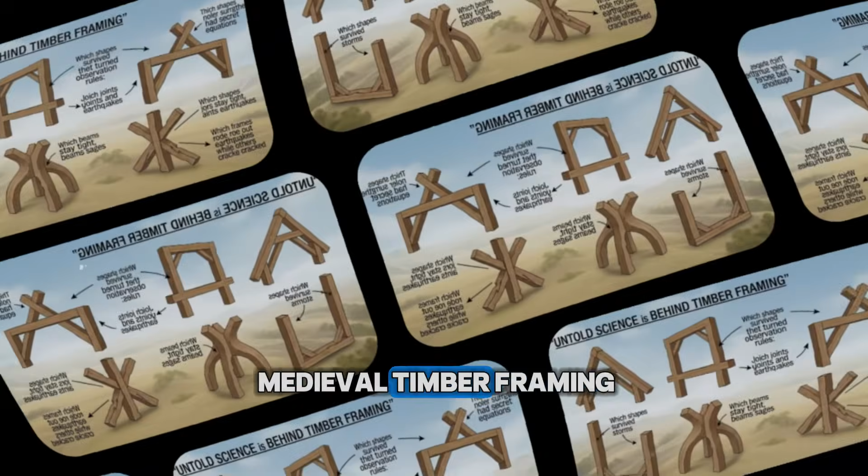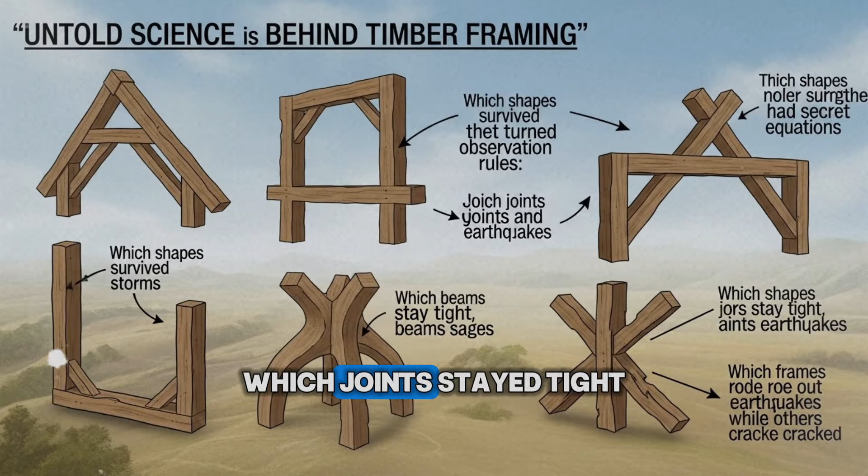The untold science behind medieval timber framing is not that they had secret equations. It is that they turned observation into rules, which shapes survived storms, which joints stayed tight, which beams sagged, and which frames rode out earthquakes while others cracked. Over generations, those rules became a language of posts, beams, and braces that modern engineers now recognize as efficient structures.

The first piece of that language is simple. Always fight bending with triangles. A single beam spanning between two supports is a bending machine. Load it from above, and the top fibers compress while the bottom fibers stretch. The longer and thinner the beam, the worse the bending.

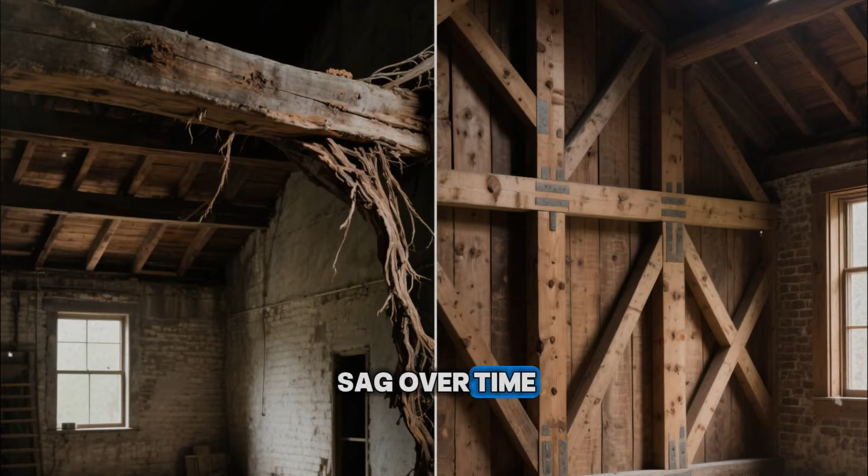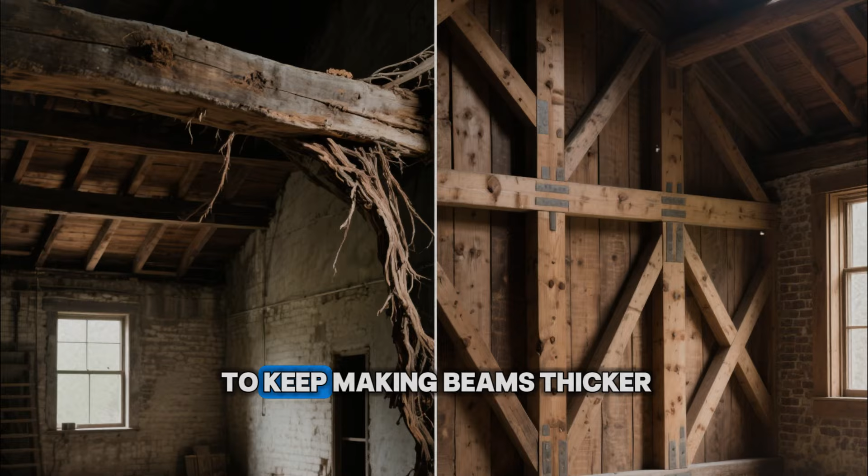Medieval carpenters watched beams sag over time in lofts and barns. They did not know the word moment, but they knew the feeling of a floor that bounced, a tie beam that slowly crept downward, a roof that began to sway. Their answer was not to keep making beams thicker. It was to change the shape of the structure itself.

Look at a traditional timber frame from the side and you will see it. Triangles everywhere. A pair of rafters meeting at a ridge, tied together by a horizontal tie beam. Diagonal braces running between posts and beams. Cruck frames, those huge curved timbers shaped like an A, creating arch-like forms. All of these are ways of turning a floppy rectangle into a locked triangle.

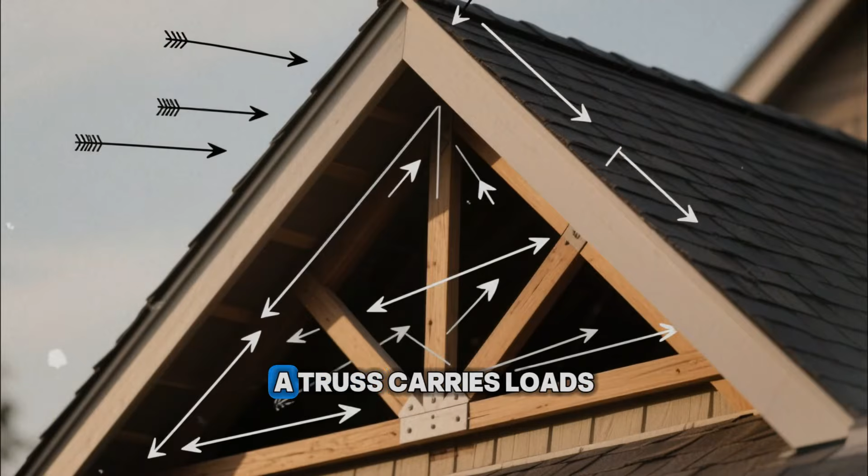In engineering terms, they move the primary forces from bending to compression and tension along members. A truss carries loads by pushing and pulling in line with the grain instead of asking a beam to resist sideways bending alone. Medieval carpenters did not draw internal force diagrams, but they saw that when rafters were tied and braced, they stopped spreading walls. The mystery science is simply this: triangulation.

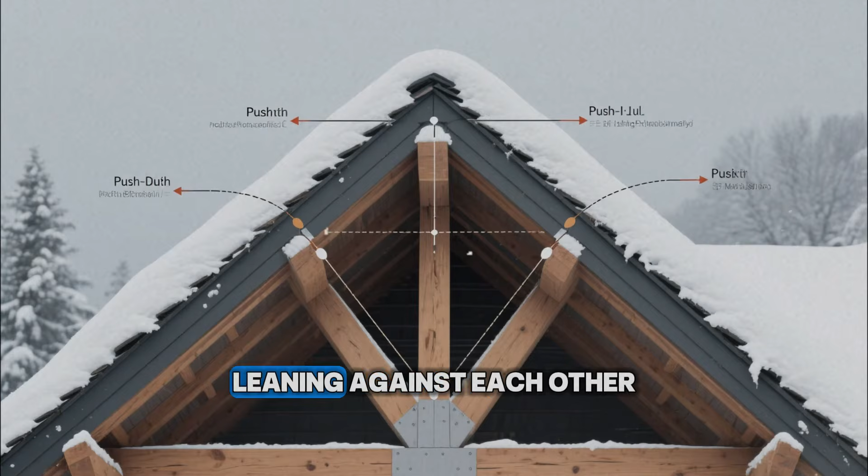That triangulation is clearest in roofs. A simple pair of rafters leaning against each other like an inverted V will push outwards at their feet as they carry the roof's weight and any snow on top. Left alone, they slowly shove the walls apart.

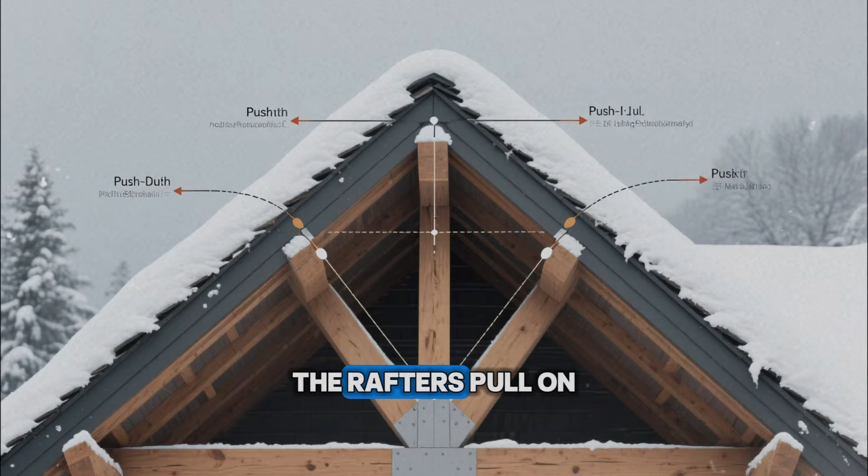Medieval builders learned to tie the feet together with a horizontal member, the tie beam. Now, instead of pushing the walls away, the rafters pull on the tie beam, which resists in tension. The load flows down the rafters in compression, across the tie in tension, and into the posts.

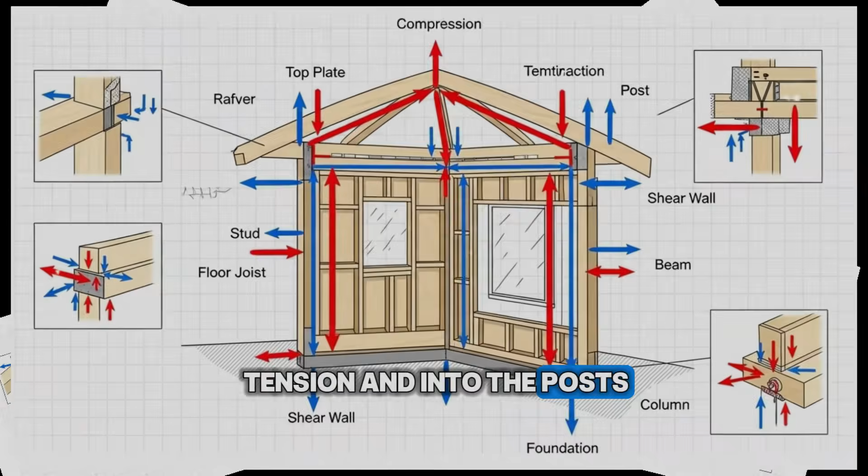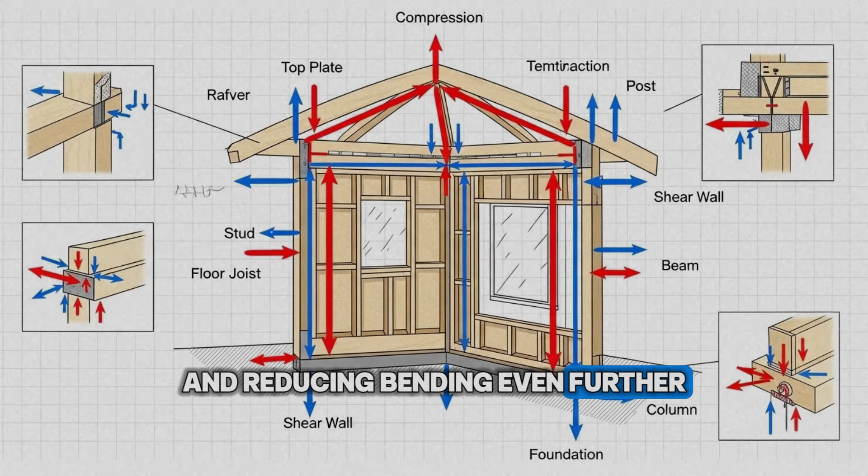Add a king post or queen posts between the tie and ridge, and you get more support in the middle, shortening the effective span and reducing bending even further. Modern texts call these king post and queen post trusses. Medieval carpenters just called them good practice.

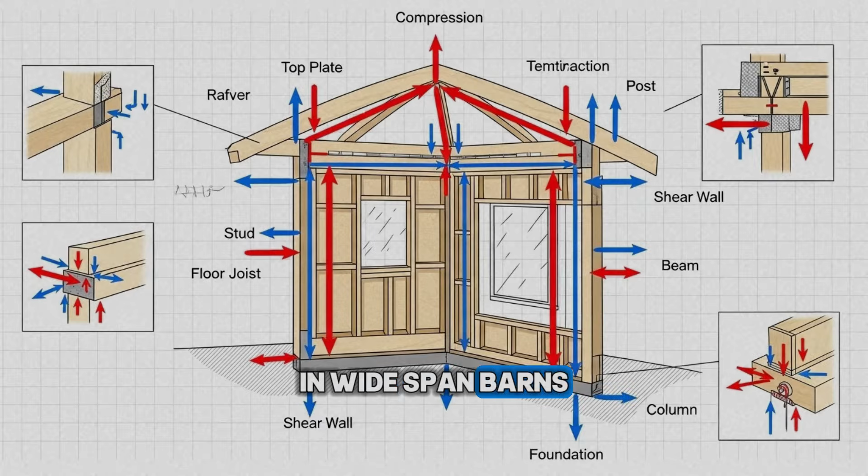In wide-span barns and halls, they extended this logic. Cruck frames, the huge curved blades hewn from naturally bent trees, were not rustic ornament. Their curved shape placed more wood where bending stress would be highest and allowed the roof load to pass down in a smooth compression curve toward the ground.

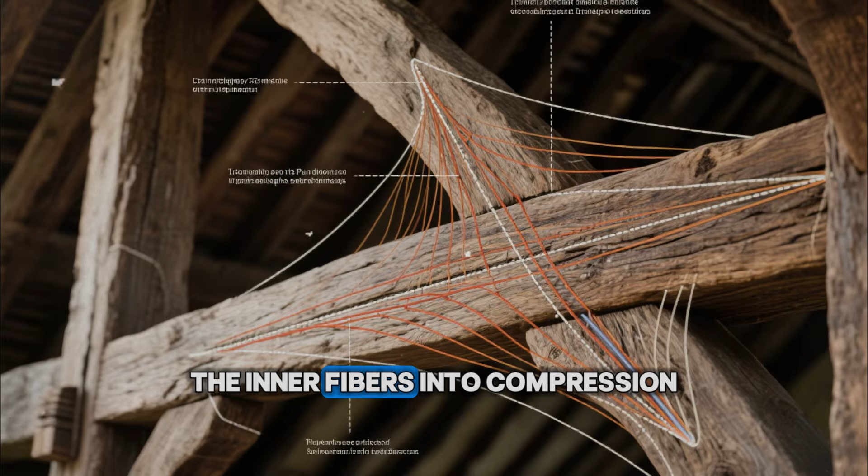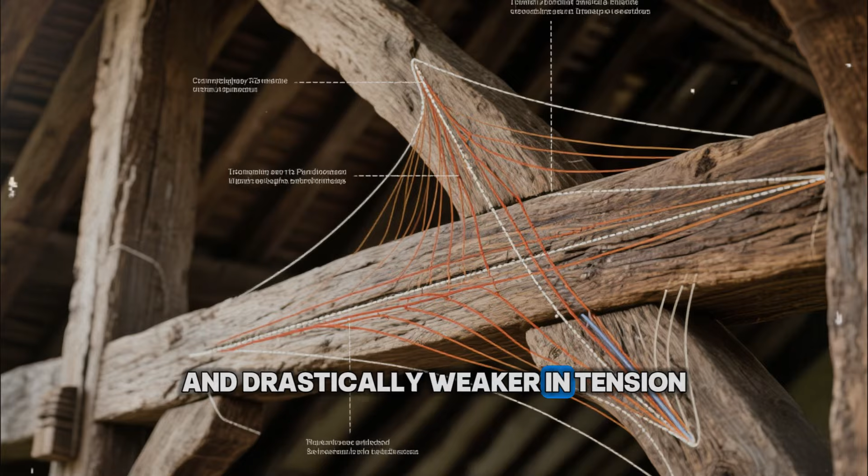The outer fibers of the curve go into tension, the inner fibers into compression, a pattern that suits the anisotropic nature of wood, better in compression along the grain than across it, and drastically weaker in tension perpendicular to the fibers. By exploiting natural tree curves, carpenters essentially pre-bent their beams into the shape loads wanted them to take, reducing dangerous stress concentrations.

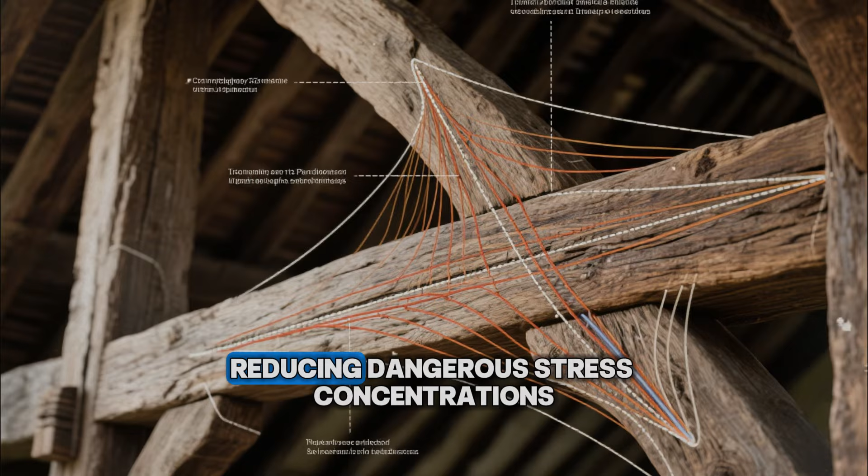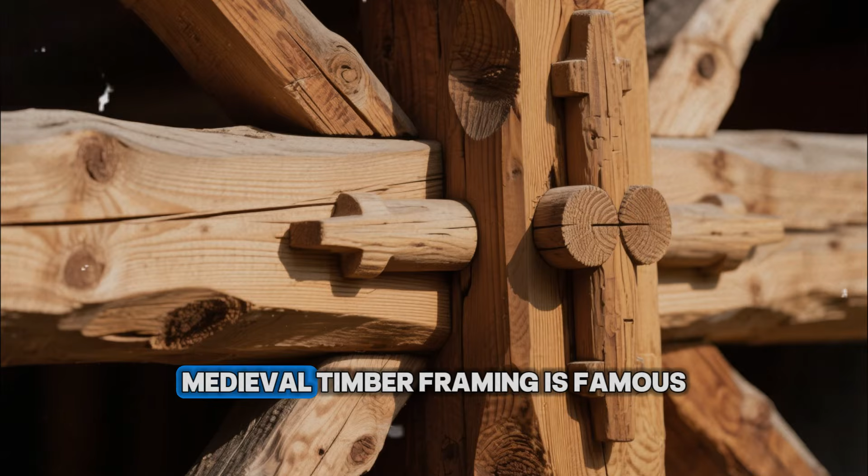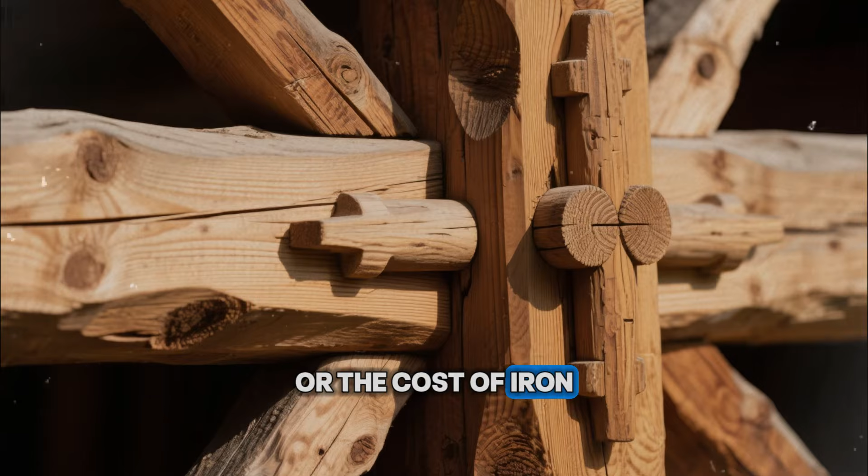Next comes the part that most people notice without understanding: the joints. Medieval timber framing is famous for mortise-and-tenon joints secured with wooden pegs instead of metal nails. That choice was not just about tradition or the cost of iron. It is deeply tied to the way wood moves and how loads travel through the frame.

A tenon is a projection at the end of one timber that fits into a matching slot, the mortise, in another timber. When a peg is driven through both, the joint works in bearing along the grain and in shear across the peg. That means the heavy beam can transfer load directly into the post, with large bearing surfaces and gradual stress transitions, instead of concentrating everything at a couple of metal fasteners.

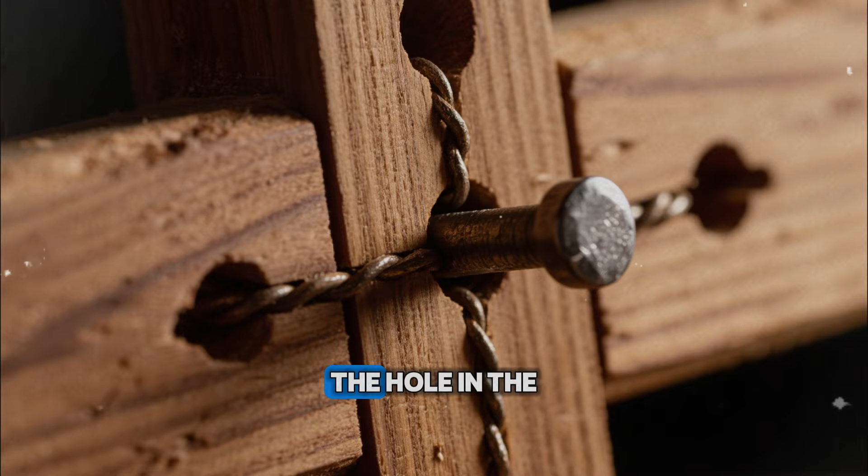Master carpenters took this further with drawbored joints. In a drawbored mortise and tenon, the hole in the tenon is intentionally offset slightly from the hole in the mortise cheeks.

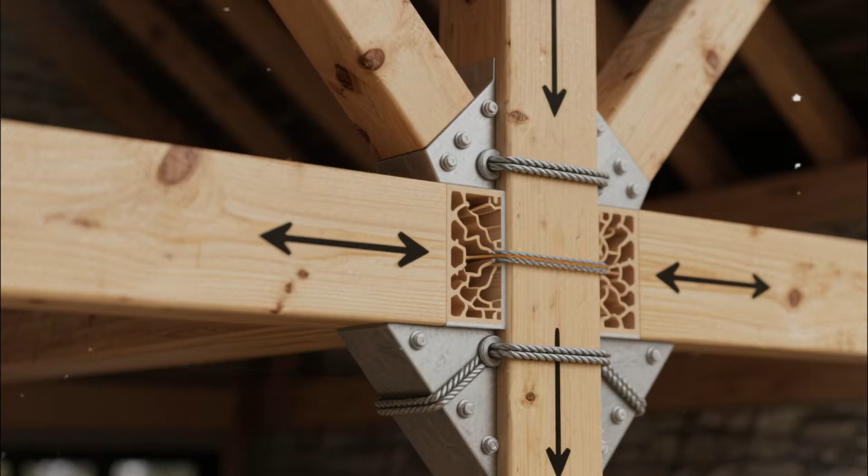When the peg is hammered through, it pulls the tenon deeper into the mortise with constant tension. The result is a self-locking joint that stays tight even as the wood shrinks and swells with changing humidity. Structurally, this pre-stressing reduces slip and racking under lateral loads. The joint behaves more like a monolithic connection, improving the frame's ability to act as a single, stiff box.

The science hiding here is pre-tension, the same principle behind modern post-tensioned concrete, applied with a mallet and a hardwood peg. Look carefully at where carpenters chose to put those joints, and you find even more physics. They avoided chopping big mortises into the middle of highly stressed spans. Instead, they placed major joints close to supports, where bending moments are lower and longitudinal compression and shear dominate.

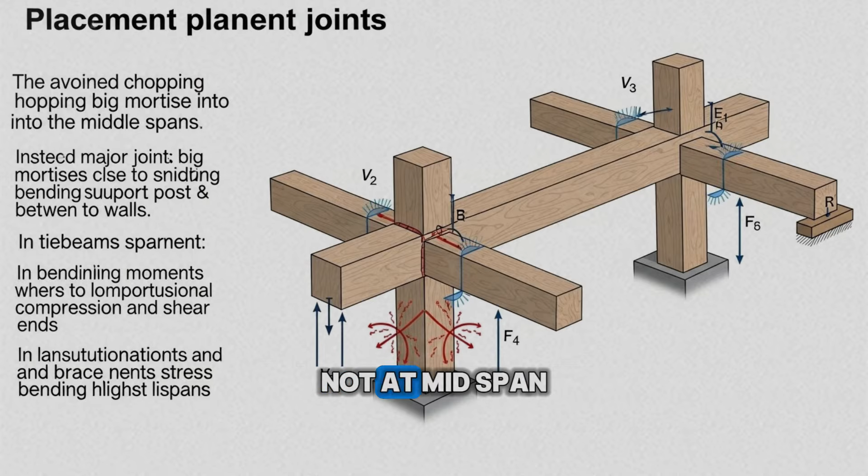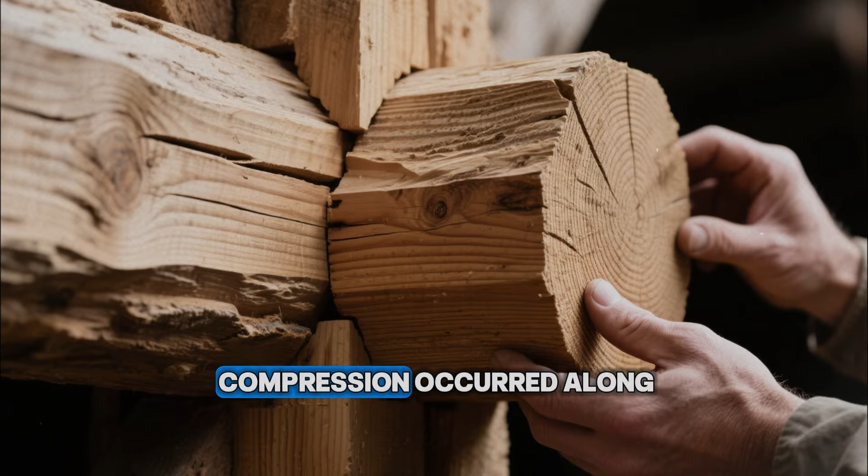In tie beams spanning between walls, joints to support posts and braces often occur near the ends, not at mid-span where bending is highest. They thickened sections near joints, giving more cross-sectional area for load transfer and reducing stress per unit area. They oriented grain so that tension and compression occurred along, not across, fibers whenever possible. Without ever saying the words stress concentration, they behaved as if they understood it.

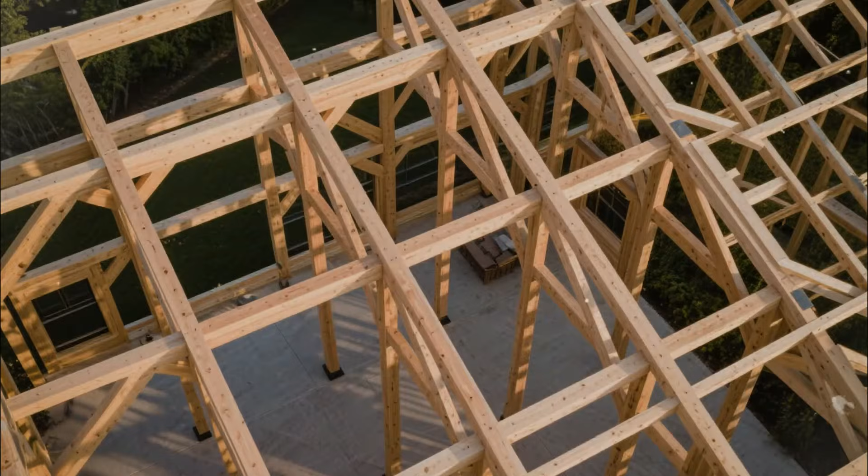The layout of an entire timber frame is another kind of silent equation. Viewed from above, many medieval houses and barns use a regular grid of posts and beams, bays, that repeat. This modularity had practical benefits for cutting and assembly, but it also spreads loads more evenly. Every frame, each pair of posts with connecting tie beam and braces, acts as a portal frame that can handle vertical loads and horizontal forces from wind.

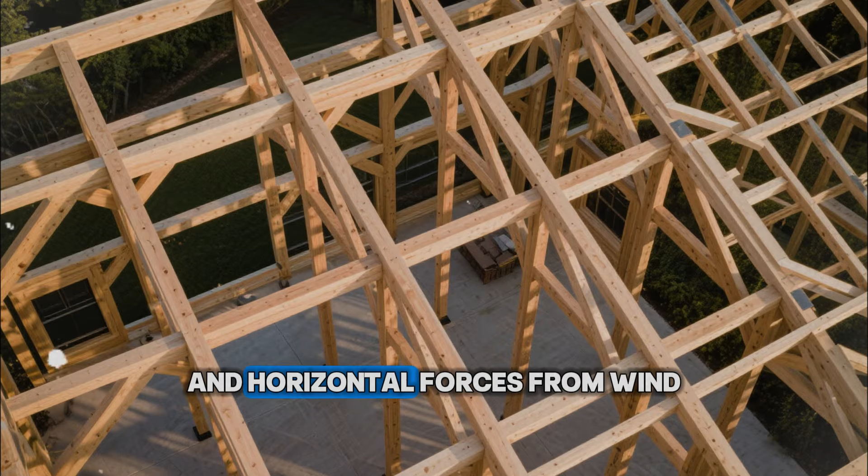Connect a series of these frames with longitudinal rails and braces, and the building becomes a three-dimensional box, sharing forces between frames. This box frame behavior is now recognized in structural engineering as a very efficient way to resist lateral loads, including earthquakes. After the 1755 Lisbon earthquake, similar ideas were codified in the famous Pombaline-Gaiola timber infill system. Medieval carpenters had already been hinting at the same logic centuries earlier.

Bracing is where their intuition about dynamics really shows. A simple rectangle of posts and beams racks easily under sideways loads. It deforms into a parallelogram. A diagonal brace turns that rectangle into two triangles. Medieval builders placed braces strategically between posts and beams in wall bays, often near corners, to stiffen the frame.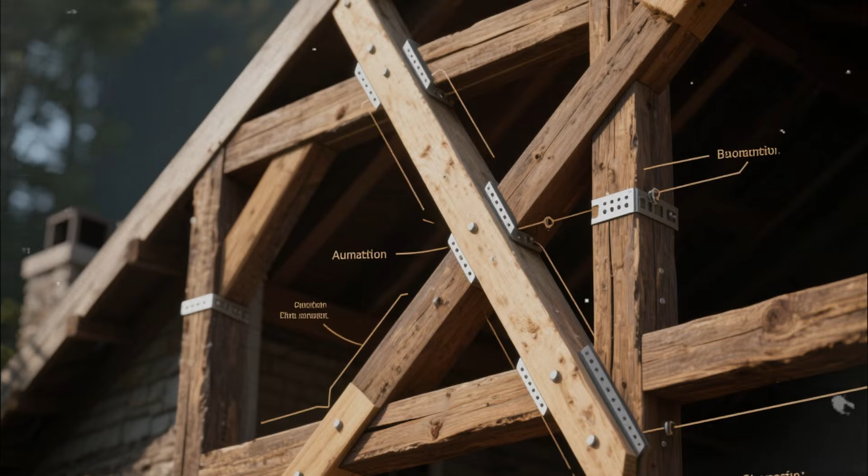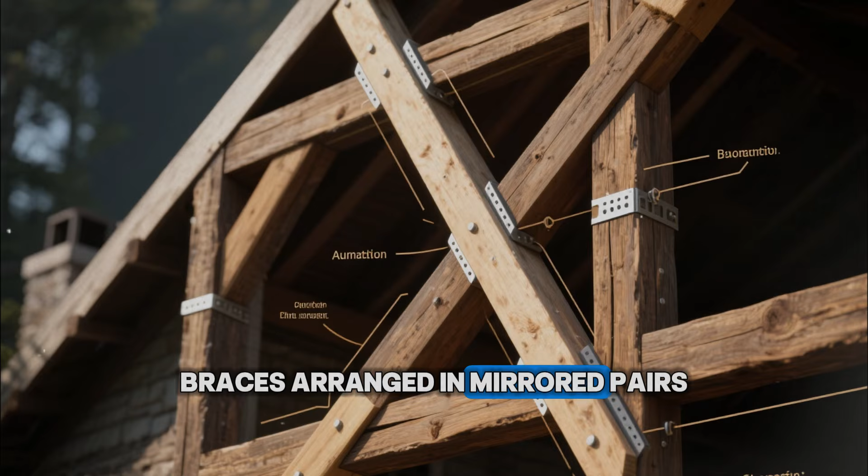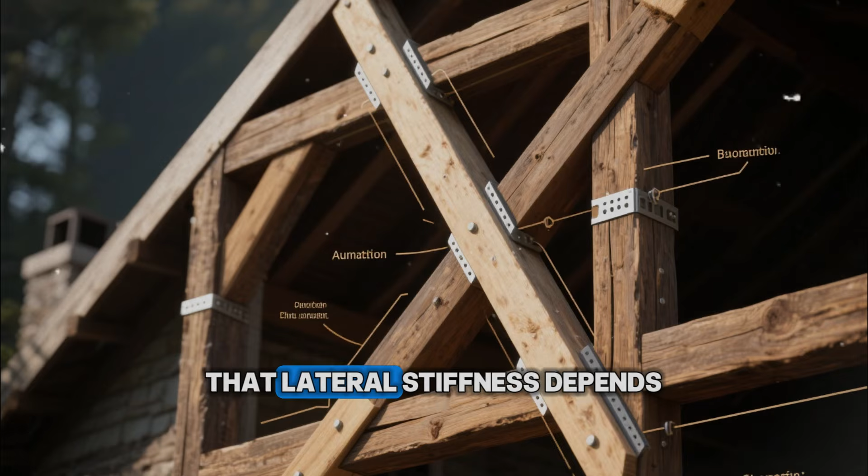But they did more than just throw braces anywhere. Studies of historical frames show consistent patterns: braces that are long enough to be effective, but short enough not to interfere with openings; braces arranged in mirrored pairs to avoid twisting the building; braces placed higher where bending and racking effects are more severe. They understood in their own language that lateral stiffness depends on both brace angle and length.

One of the least romantic but most powerful pieces of science behind medieval timber framing is simply knowledge of material properties. Carpenters knew their wood, not as numbers on a chart, but as weight, grain, sound, smell. They knew that slow-grown oak with tight rings and straight grain made better posts and tie beams than fast-grown, knotty material. They knew that sapwood rotted faster than heartwood and kept it out of critical sections.

They knew that wood is anisotropic, stronger along the grain than across it, and aligned members so that major forces stayed as parallel to the grain as possible. When they squared logs by hewing, they oriented the heart in ways that optimized strength and minimized checking. Modern conservation work on historic frames has confirmed that many critical members are, by today's standards, conservatively sized and made from higher quality material than most off-the-shelf lumber.

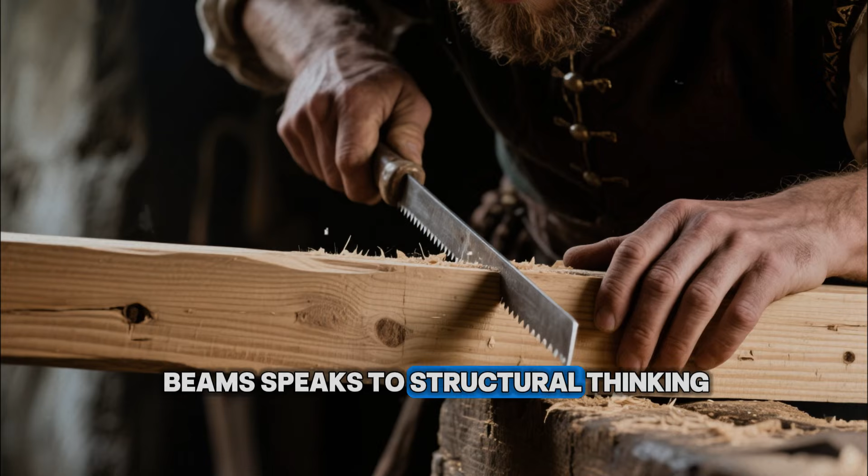Even the way they cut beams speaks to structural thinking. In many medieval buildings, important timbers are not sawn from anywhere in the log but riven, split along the grain. Riving follows natural fiber lines, producing pieces with fibers running straight end to end, free of cross-grain tears and micro-cracks. That makes the member significantly stronger in tension and bending along its length than an equivalent section with grain runout caused by sawing.

For braces and curved members, carpenters often sought naturally curved trees, so the fibers followed the curve. This allowed the member to work in pure fiber tension and compression along the curve instead of having to resist tension across grain, exactly the sort of failure mode that leads to sudden brittle breaks.

As frames grew more ambitious, large barns, multi-story houses, big civic halls, carpenters moved from purely empirical rules into what we would now call typologies, standardized structural solutions for common problems. Cruck frames provided wide, open interiors with minimal internal posts. Aisled barns used inner rows of posts and arcade plates to reduce span and distribute loads. Long tie beams held walls together, while queen post trusses above allowed open central spaces without huge, sagging members.

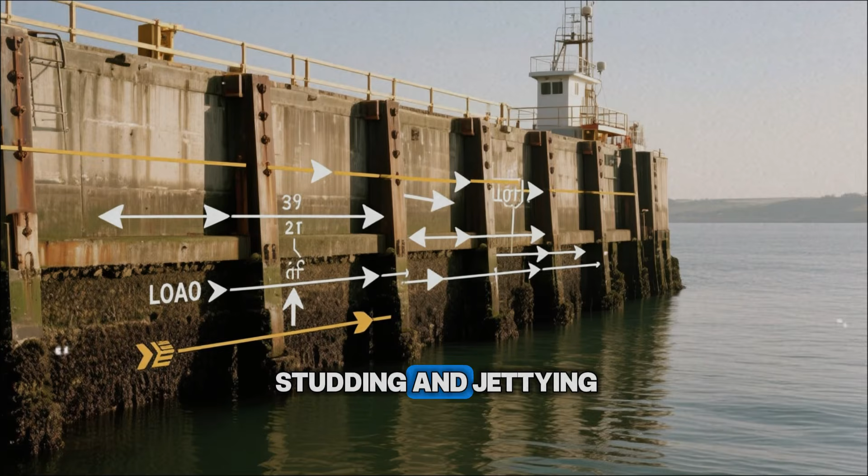In some regions, specific patterns like close studding and jettying, upper floors projecting beyond lower ones, developed, each with its own load path logic. Jettying, for example, shifts upper floor loads back toward the interior, reducing cantilever effects and allowing posts to carry combined loads more directly into foundations. These were not random stylistic flourishes. They were iterative solutions to structural and spatial constraints.

Connection details reveal another level of quiet sophistication. How to let a building move without breaking. Wood swells and shrinks as humidity changes. Long members creep under load. If you rigidly lock every joint, you store stress until something snaps.

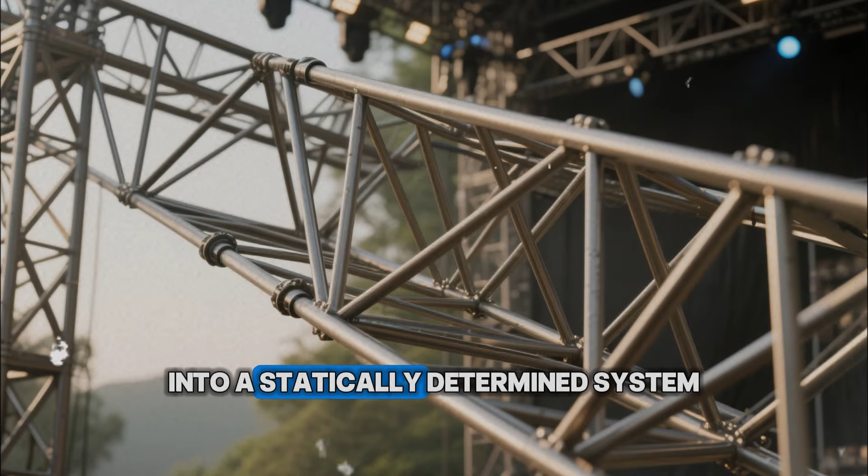Medieval joints, especially in roof structures, often allow controlled rotation. A classic king post truss, for example, may rely on bearing surfaces and pegs that transfer load but still permit slight hinge-like motion at certain points. This turns the truss into a statically determined system that can tolerate settlement and small shifts without developing large internal stresses. The science word is ductility, but to a carpenter it was simply building forgiveness into the frame.

At the same time, certain joints were deliberately overbuilt to behave more like fixed connections. Halved and housed joints, where one beam sits partly cut into another, create broad bearing surfaces that share load in compression. Splayed and tabled scarf joints, used to join two shorter timbers into a longer span, interlock in 3 dimensions, sometimes with keys, pegs, and wedges that resist both tension and bending.

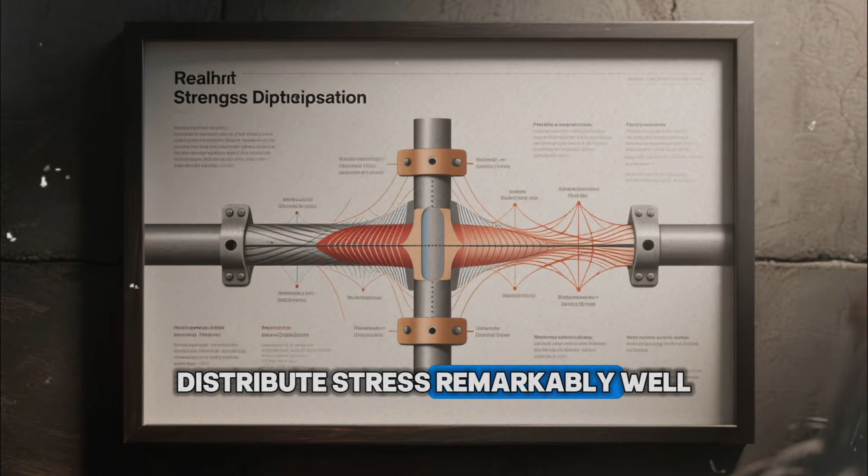Modern analysis has shown that some of these scarfs distribute stress remarkably well along the joint length, reducing peak stress and fatigue. They are physical manifestations of what an engineer would call load distribution and redundancy.

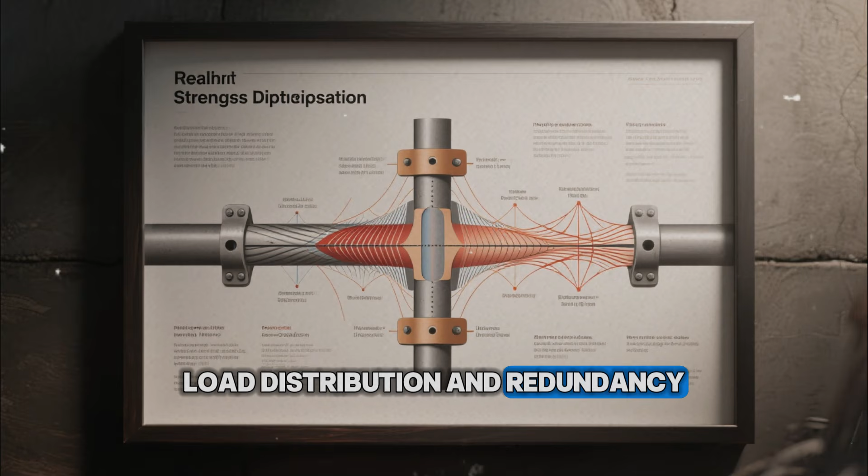The science behind medieval timber framing is not just in the wood and the joints, it is also in how frames were put together. Marriage marks, numerical or symbolic markings on timbers, tell us that frames were often pre-assembled on the ground. Carpenters laid out full-sized frames, flat, assembled joints, checked fits, and then raised the entire bent as one unit. Structurally, this allowed them to verify that all joints pulled tight and that the frame behaved as expected before committing it to height.

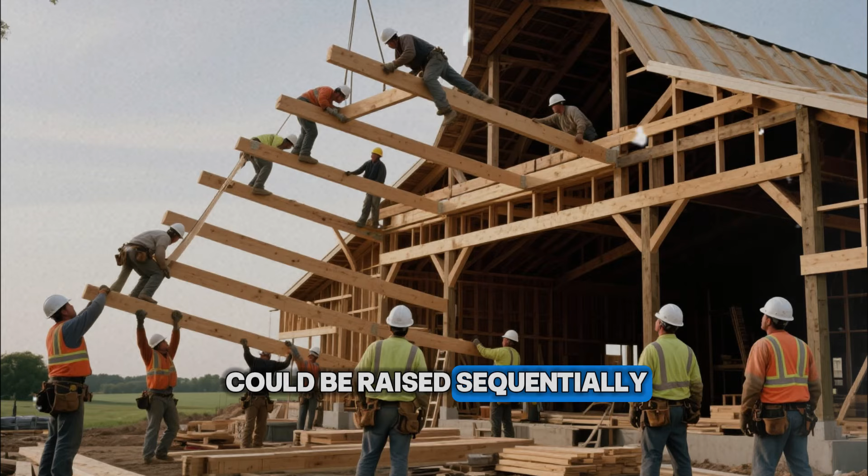In large barns, a series of bents could be raised sequentially and tied together with longitudinal members and braces, creating an immediate three-dimensional structure that gained stiffness rapidly as the build progressed. This method reduced the risk of partial, unstable assemblies that might rack or collapse during construction.

It is tempting to imagine medieval timber framing as frozen in time, but it evolved in response to new pressures, literally. As buildings grew and cities became denser, fire, wind, and even seismic events challenged old patterns. In some regions, builders experimented with box frames and infill that provided better resistance to lateral loads, especially in earthquake-prone areas.

After major disasters such as earthquakes and urban fires, treatises and local regulations sometimes codified timber frame patterns that had proven safer. Later historical analysis of those systems shows many of the same strategies modern seismic design uses. Regular grids, continuous load paths from roof to foundation, and diagonals that help dissipate energy.

Yet for all the complexity hiding in the timber, the guiding logic remained surprisingly consistent. Work with the material, not against it. Turn bending into axial forces wherever possible. Lock planes with triangles. Keep joints in low-stress zones. Allow some movement where necessary, and oversize critical members when uncertainty is high.

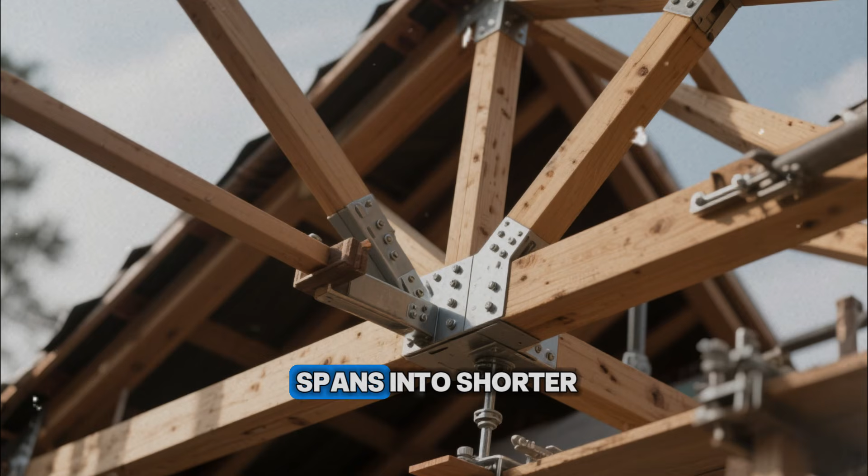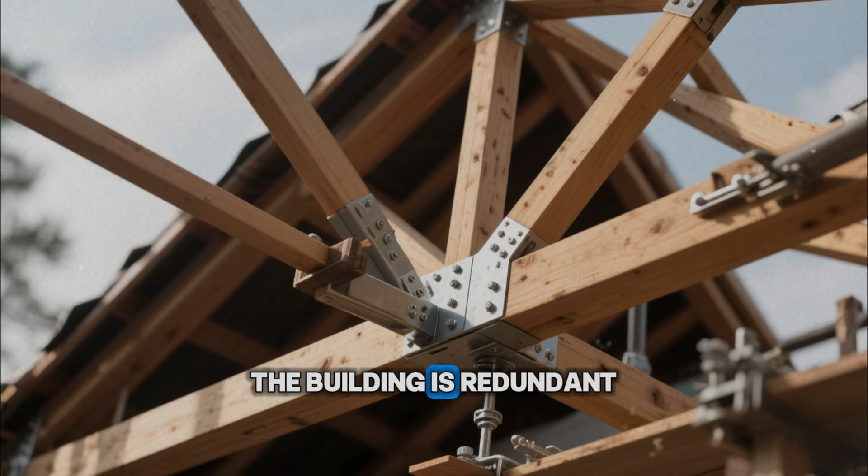Roof trusses convert wide spans into shorter effective members. Connections are detailed to handle load transfer without crude stress spikes. The building is redundant enough that if one brace weakens, others still share the work.

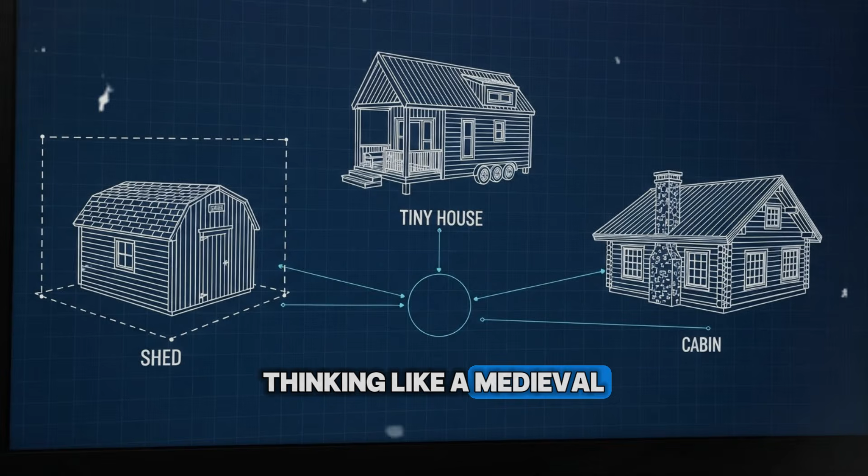For a curious, practical, nostalgic viewer, the real payoff of this untold science is not just admiring old buildings. It is recognizing that you can borrow the same principles today, even on a small scale. If you're designing a shed, tiny house, or cabin, thinking like a medieval carpenter might mean choosing fewer, heavier, well-placed members instead of many flimsy ones. Using real triangulation, proper braces, rather than relying on thin sheathing alone.

Placing major joints near supports and thickening wood where load flows change direction. Letting certain joints act like hinges while making others solid and well-housed. Respecting grain direction, using riven or straight-grained pieces for highly stressed members. You don't need to reject modern tools or codes, but understanding why that old barn down the road is still standing can make your work sharper.

It can also answer a quiet question many people have when they stand under centuries-old beams. Did they just get lucky? The answer, almost always, is no. Medieval timber framing works because people paid attention, obsessively, to what gravity, wind, and time were telling them. They watched where frames cracked, where joints opened, where roofs sagged. They changed patterns, refined joints, standardized best practices long before anyone had a name for best practice.

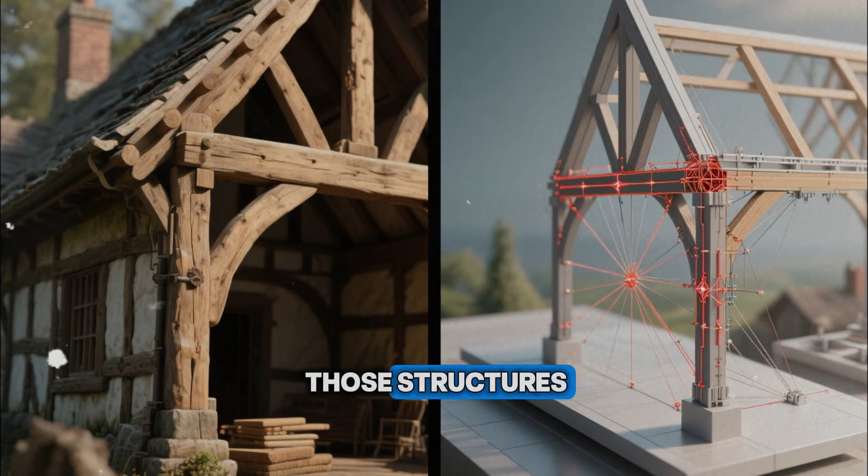When modern engineers model those structures, they often discover that the primitive designs show remarkably good stress distributions, comfortable safety margins, and graceful failure modes. That is the untold science, a world where structural engineering existed, but its formulas were stored in calloused hands, in guild rules, in the angle of a brace, and the slight offset of a peg hole. A world where every timber frame was a solved equation you could walk inside without ever seeing the math.